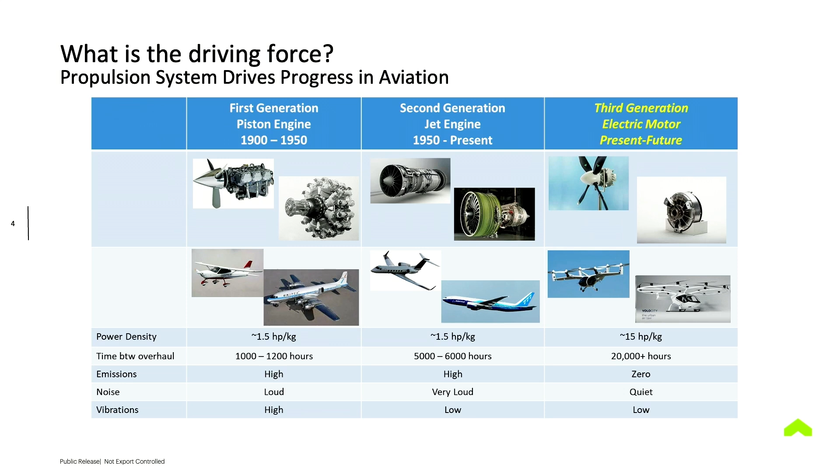The third generation, the whole driving force of UAM right now, is the invention and commercialization of electric motors, which gives zero emissions because we're using electric batteries, and quiet operation because we're using distributed electric propulsion technologies.

Distributed electric propulsion, you can search it, there are great papers out there, but in short, it is the capability of isolating the thrust-producing propulsor, jet and fan, from the power-producing components, traditionally the engine, and those two systems do not necessarily share the same mechanical power transmission system. Because of this decoupling, and because the power-producing components can be combined with the energy storage system, the battery, we give the thrust-producing propulsors the freedom to use any variation of devices that meets various sizes and types.

Because we can decouple this, you're seeing all these crazy vehicle design ideas out there. Some examples are here. One thing I noticed, I didn't put Supernal in here because I prepared this deck a couple years ago for a different conference. I should have done that. But if you search it up, we have the SA2 version that we announced several months ago. And the point here is that these are the driving technologies behind it, hence you see the various different configurations, which gives the FAA a headache.

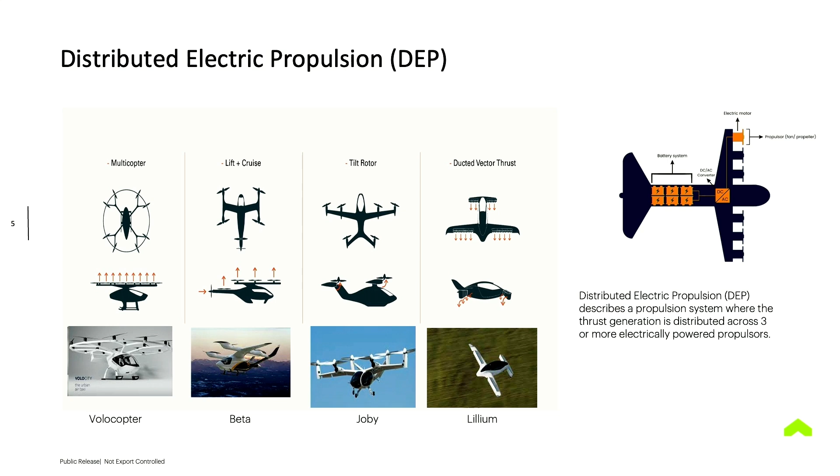Like, how do we certify this vehicle? These are brand new vehicles, a type of configuration that we haven't seen before. Hence the FAA is taking time and working with the industry to come up with how we ensure the safety and how we certify this vehicle. I'm going to come back to this one because that poses quite a lot of challenges, because we're introducing that energy storage system.

Briefly, what are the types of missions? Again, I'm going to go really quickly because this is information you can search. I'm focusing on short-range urban air mobility, the people-carrying vehicle. But there are various different types, and when it comes to regional air mobility, we could potentially put quite a lot of people there. But primarily right now, the focus for RAM is cargo.

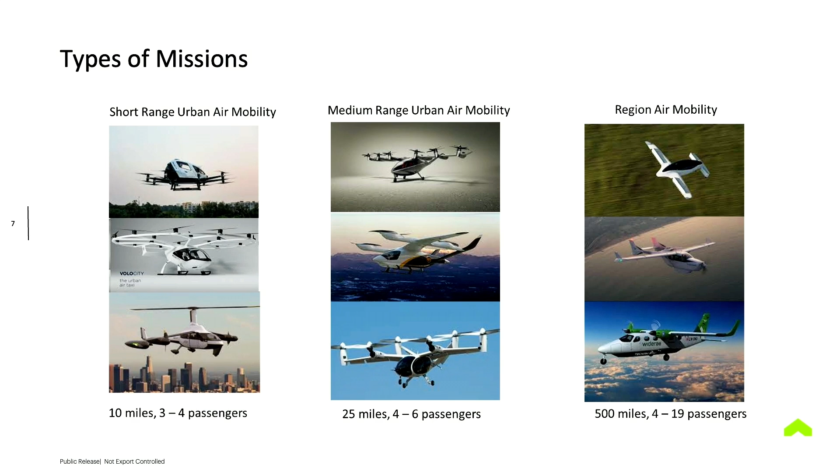For short urban air mobility, the payload is around 1,000 pounds. And the people, about 2 to 5 passengers, depending on the OEMs; it sort of varies. And the distance, we're thinking about 10 to 70 miles per trip. Infrastructure: keep in mind that we need a place to land our vehicle and to take off. Those are a very different set of configurations than you can imagine for helipads.

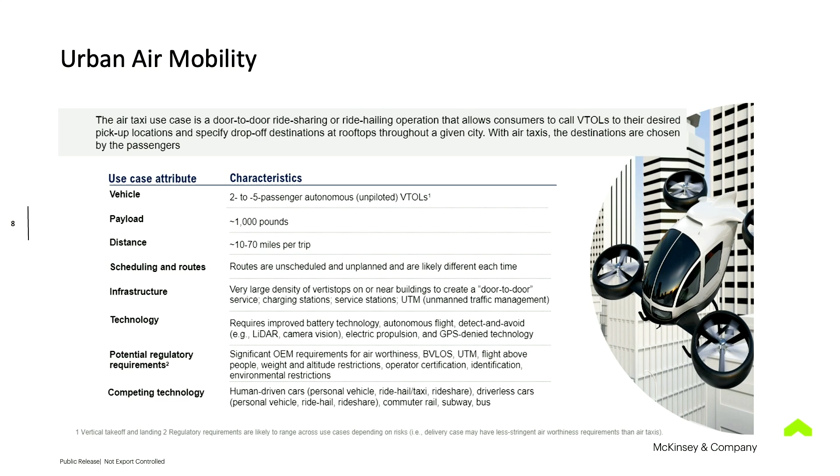And because of the new vehicle infrastructure and configuration that we're introducing, regulatory requirements are non-existent at the moment. Now, after several years of working with the FAA and the industry, we have a somewhat good understanding. But overall it's not just the technical industry that is the problem; it's a more overall problem that involves quite a lot of regulators as well.

In terms of market, I'm not going to read through. Those are really large numbers, and quite a lot of people are doing assessments about how large the industry is going to be. But as you can see, it actually enables a large market if we know how to automate properly, which is one of the keywords I mentioned before, and by enabling multiple different infrastructures and the players that we're newly introducing to the industry.

The Elevate missions are very different missions than what you see currently. Fixed wing has a very different profile. You take off, then you cruise, and then you descend. Helicopters are completely different as well, right? You vertically take off, you do the cruise, and then you land.

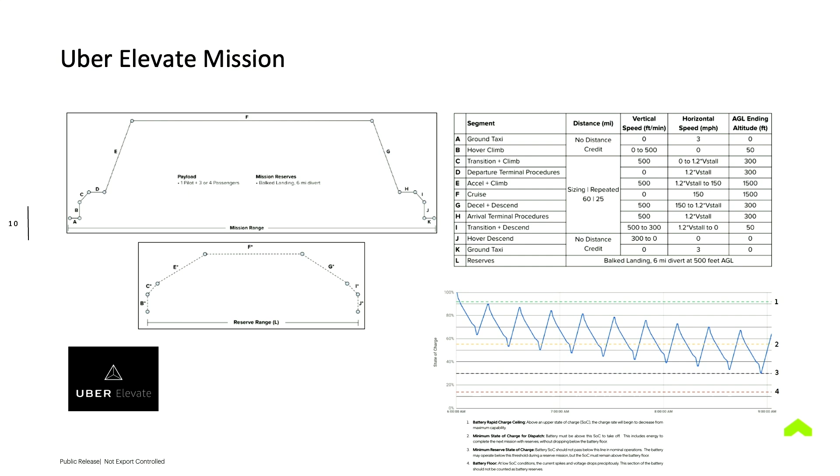Here, because we're able to transition our thrust and lift, we take off like a helicopter and transition to something similar to a fixed wing, then we ascend and continue cruise, where it's most optimized with the fixed-wing-like configuration. And while we descend, we change our thrust again to be able to vertically land. A completely different set of configurations, completely different missions. Again, that poses quite a lot of open, interesting problems as our industry goes.

Corridors. You know how the large commercial airliners fly, through Class B up to Class A, at very, very high altitude. You don't necessarily see them. We keep it that way for many different reasons. You know helicopters. You don't see them around the city because of how loud they are and the downwash effect of the one rotor. If we're going to deploy this vehicle into a city like Berkeley or San Francisco, connecting with San Jose, it would have to fly right above your neighborhood, your residential area.

And the problem we'll be facing is a very different set of problems than existing aviation has been solving. We're going to be facing many different cooperative and uncooperative agents in the airspace, as well as a terrain problem. It's a completely different magnitude than that of existing problems.

I'm going to talk more about that, but the idea we're implementing, doing exercises and experiments with the FAA and NASA, is that we should build the highway, the corridors, for UAM specifically, so that none of the other vehicles can enter. Well, no, other vehicles can enter in here, but it's primarily dedicated for UAM operations and missions.

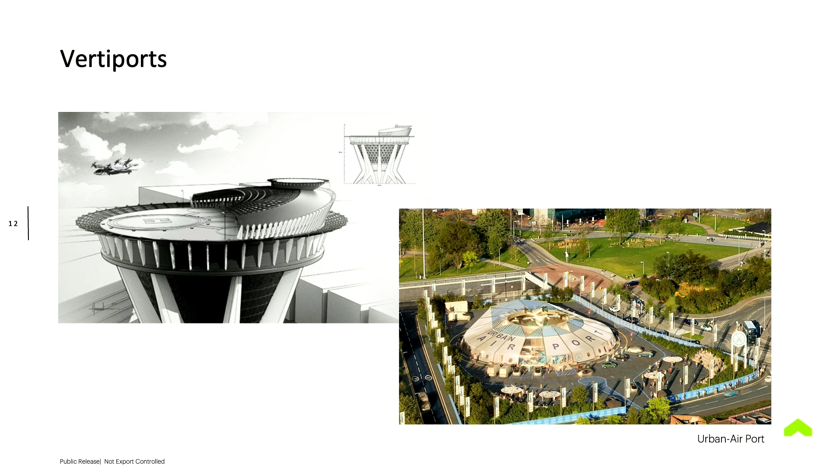If we put it inside the city of LA or San Francisco, we would have to involve the city planners and city mayors, because they're much more interested in case things happen here, or whether they can use it for emergencies, like dispatching or working with the fire department. So we need to establish a good understanding of the use cases and regulations, and then get it certified with the city mayors, so the entire industry gets quite complex with different authorities.

So I'm going to talk more about the technologies and the gaps, as I promised you in the beginning of the session. Starting with the electric motors and propulsion, and battery technologies that I'll briefly go over. Then come the sensors, because we're automating our operations and missions. And there's AI, software and ML. We need data, which we rely on heavily for sensor fusion as well as making decisions. Those are important, and we're working on them.

And that actually requires quite a lot of heavy compute power. The whole reason you're seeing autonomous ground-level vehicles is because compute power was available in GPUs, able to gather all the data with the cloud, and we have large storage where we can train on all this data. When it comes to aviation, I'll talk a little more about how that's posing problems.

And satellite communications, because I briefly mentioned new agents, or roles and responsibilities we're adding into the UAM industry. Typically in the aviation industry, except general aviation, if you want to control your missions and make sure you're handshaking with the authority, it's been done through voice between ATC and pilots. And ADS-B is the only mechanism by which we're broadcasting and sharing intent digitally.

So I'm going to go back to this stack, because right after DEP, I mentioned the energy storage system, where we can decouple the power-producing components from the thrust. I briefly mentioned how we take off, climb, cruise, descend and land. Those are a very new mission profile for UAM. One thing that we also have to put as part of our nominal mission is emergency diversions.

In case things are happening at the vertiport on the path where we try to land, or in case the fire department wants to utilize the vertiport, for example, for whatever the situation.

Electrical energy storage systems for eVTOL would have to have those reserves. It's not like you're driving your vehicle and you've got some issues so that you can just park on the side lane and wait. We would have to make sure that we've got enough energy, because we're considering that as nominal cases, and up there in the corner, those are called the reserve energy. Those are mandated by the FAA.

Right now, as of today, the FAA's mandate is a 30-minute reserve. If you remember my introductory slide deck, I said anywhere between 10 to 70 miles of missions. Our target here is from San Jose to SFO, San Francisco, and we want to complete the mission in 15 minutes. Reserving 30 minutes is a very, very high toll. The FAA is putting that in because of uncertainties, right? The energy storage system, as well as the power-producing component, is completely brand new.

When it comes to situational awareness, I did talk about cooperative and uncooperative agents briefly in the previous deck. Because we're flying at a lower altitude, when we're building this UAM vehicle, we should be able to fly through somewhere like Manhattan. Quite a lot of problems, right? These are the terrains and problems we would have to solve, and these are uncooperative agents. How we're actually going to identify and solve that is also the biggest problem when it comes to situational awareness. So, the sensors.

I'm going to move it over here. These are the new types of sensors that we're deploying in aviation. Just like batteries, some of those technologies are already matured and commercialized on the automotive side. With sensors, we're talking about a similar set: radar, not so much lidar, but cameras, thermal and IR cameras or visual cameras, and coupling that with the software stack on top of it.

Just like a battery, we're facing a different problem. On the automotive side, it's more of a near-distance problem. They care more about, hey, the 5-year-old boy playing with a ball right there, is he gonna kick the ball in here? Then do I have to be worried about it? So the camera sensors detecting the unknown objects around the vehicle is more the near-distance problem.

We're flying fast, and so the problem that we're facing here is a longer-distance problem. So the current set of radar and cameras is not going to solve our problem immediately. So that's also another area where I am putting my head down on how we actually can solve the problem. Keep in mind the payload, we're limited to 1,000 pounds.

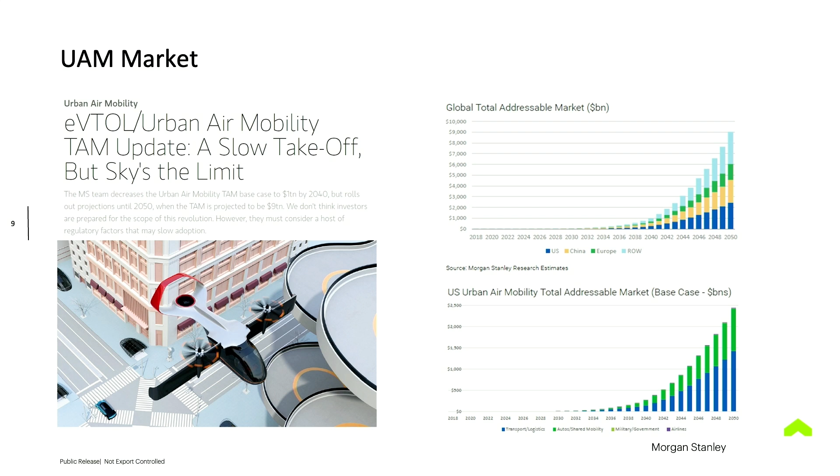And we're going to have a pilot. We're going to deploy with humans. You already know that we're suffering a worldwide pilot shortage. We're deploying hundreds and thousands of vehicles out there. If we cannot rely on pilots, we need to automate our vehicle operations. And once we have a good understanding of this automation problem, that's where we're actually going to take off with increasingly high-density operations.

So AI/ML is also a brand new headache that we're giving to the FAA. How do we certify it? When you come up with your training modules and say your model is trained, how do we verify, validate, and test it? Because this is no longer software code where they can actually read it and keep it as their artifacts.

I mentioned the computing powers. Aviation is one to two generations behind. We just got certified for the usage of multi-core. Your phone is probably 8 or 16 cores. You've been using multi-core ever since we put out the smartphone.

Aviation kept a single core and single dedicated function hardware for reasons of redundancy, having multiple dedicated function computers so that in case one box becomes unavailable or malfunctions, you still have two other boxes that can back it up.

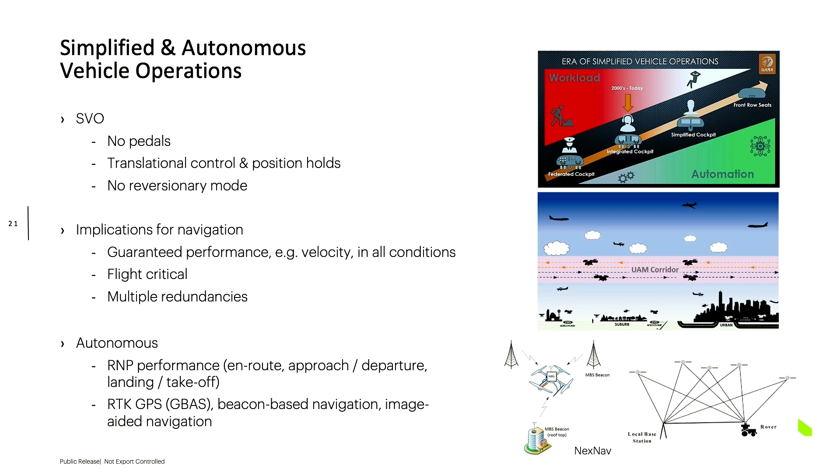I talked about the communications. Right now, the best means to communicate with air traffic controllers is via voice. And then there's ADS-B, where you're broadcasting and you can subscribe to what other vehicles are broadcasting in terms of their intention, their positions, their locations. Think about it like you only have a way to text five words to the whole world about where you are. It's not an entire message you can exchange with everyone. It's just three to five words sharing your intentions.

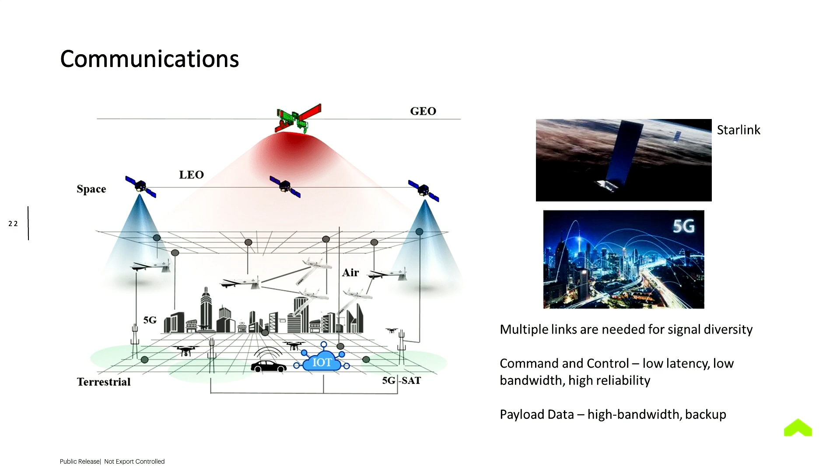That has to change, because if we're going to have a good understanding of the situational awareness problem, you want to communicate with everyone, and that poses quite a lot of challenges right now. Right now we're trying to minimize the problem, so the FAA acknowledges there's a shortage of ATC human personnel, and they're open to introducing brand new players called PSU or USS, who are sort of traffic controllers.

So the FAA is now open to having what used to be done by the ATC tower done by remotely located service providers, who can work with individual UAM fleet operators: yes, you can fly from Berkeley campus over to one of the vertiports in San Francisco. I'll give you approval to fly, and you can depart at certain hours and land at certain hours. So they can do those traffic controls.

Brand new players. How are we actually going to work with them? Because we don't want to enable voice again. So digitalizing the conversation with the PSU is the first problem for industry to solve. And as I mentioned, because they're brand new players, how we ensure the integrity of the data we're exchanging is also one of the problems I'm looking at.

We can communicate with them. We can set up the data structures: these are the acknowledgements I'm looking for, these are the messages I'm going to send. But as Supernal, a fleet operator, I'm going to be dispatching my vehicles to multiple different locations and communicating with them. I want to make sure there's a way for me to say, yep, what I get from the PSU through the com link is legit, I don't have to worry about anything. So understanding the integrity aspect is the problem I'm looking at right now.

All right, so that graph again, if you want to take off exponentially, another gap here is the manufacturing. Numbers say it over here, right? Aerospace, you pick up one of the largest OEMs as of today, they produce hundreds because everything is manual. You saw the vehicle configurations. There are some designs I've never seen before.

If you want to supply that many of the vehicles, we need to have a good understanding of how we're actually going to be manufacturing this UAM vehicle in an aviation industry, with the current framework. No one solved that problem yet. So I anticipate

we need quite a lot of engineers and a good understanding of how we're actually going to do that at large scale in the aviation industry, because there's a reason that we do it, because it holds a very specific certification. But anyone with an interest in robotics, that's where we need to fully focus.

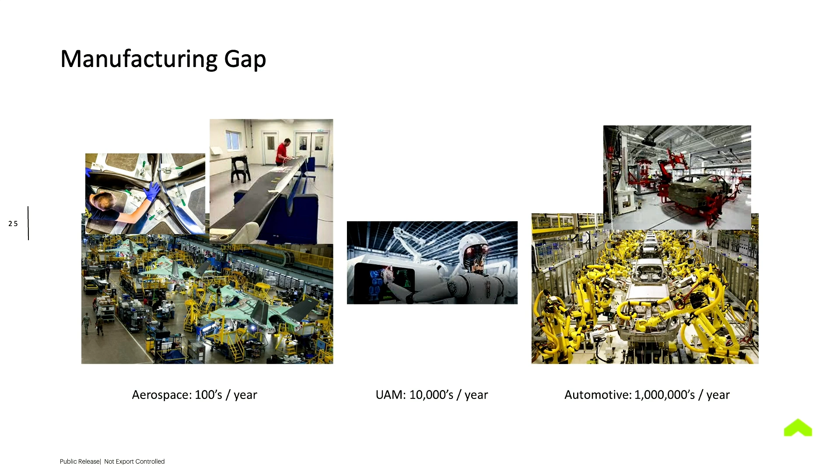Right now at Supernal, that is one of the reasons that you see these UAM OEMs invested in by the automotive industry, because they know how to put out mass numbers of manufactured vehicles. So that's also a current topic.

So for Supernal, I'm not only looking at how to automate the vehicle, because unlike the automotive industry on the ground, where you have to deal with a nondeterministic problem, an unknown problem, because you never know if a five-year-old boy is going to kick a ball out of nowhere. That is something that you just cannot get ready for.

But in the aviation industry, national airspace, you can actually put quite a lot of restrictions. So I can try to stay on the known problem and solve the known and unknown problems. There are known problems because of the issues I mentioned, but we're looking at it more holistically, inside and outside of the vehicle. I think that is the right approach, because if you just put that highly automated vehicle out there, you'd actually be facing the automotive industry problem.

There are highly automated vehicles out there, but they didn't get commercialized because of the nondeterministic problem. So for me, it is very important that we contribute to the entire ecosystem and industry the set of structures they want to implement, including the UAM corridors, so that we can limit the problems we want to tackle and efficiently automate the vehicle as well as operations.